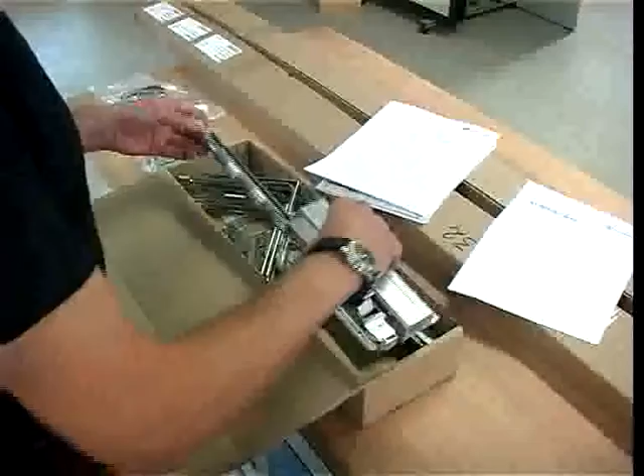You will need the following tools to install the fitting. Also required for fastening the fitting parts are a sufficient number of screws of different lengths and thicknesses.

Position the sash on the assembly table in such a way that you can easily access the handle side. Copy the necessary drilling and milling dimensions on the sash profile. These may vary depending on the type of gear that is used with the fitting. It is essential that the dimensions specified in the instructions be adhered to precisely.

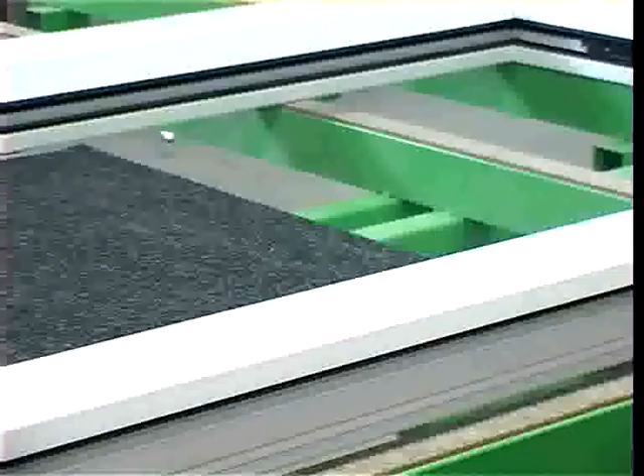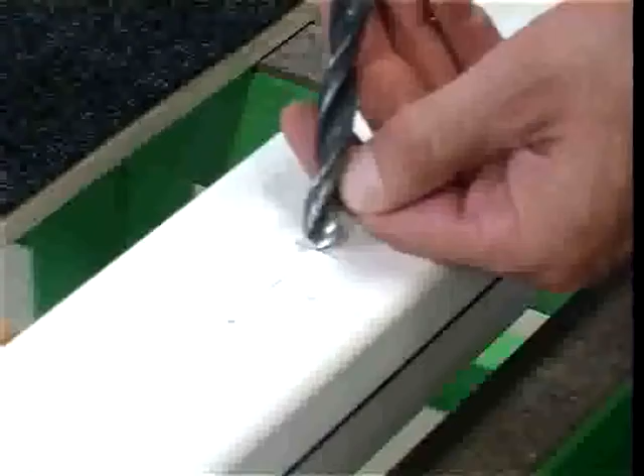After preparing the jig pattern in this way, drill a 12 mm hole that is approximately 40 to 50 mm deep. Next, mark the milled profile intended for your particular gear casing and machine it using a suitable milling tool.

The sash is now ready for the installation of the central locking gear. For this purpose, remove the four corners from the packing units and position them on the sash.

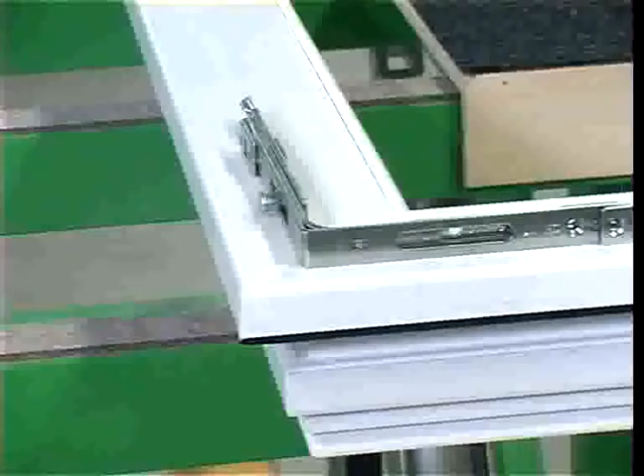It is important in this regard that you place the arms of the corners with the locking cams into the vertical sash profiles.

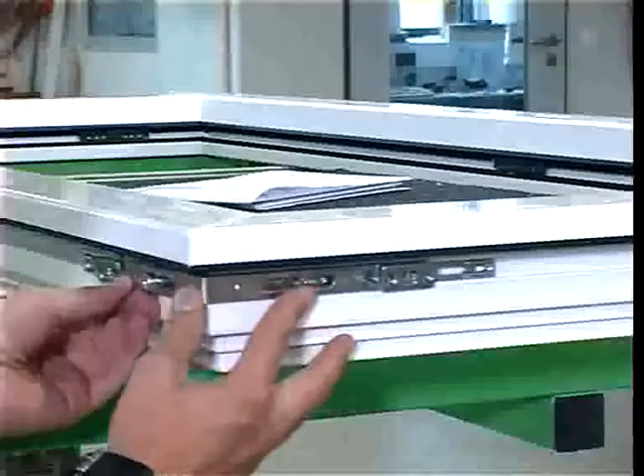Fasten the four corners using the included window construction screws. For this purpose, use the fixing holes found on the corner which are located closest to the sash corner.

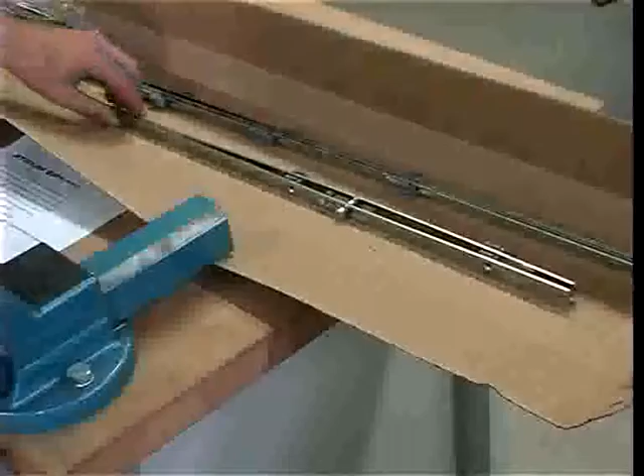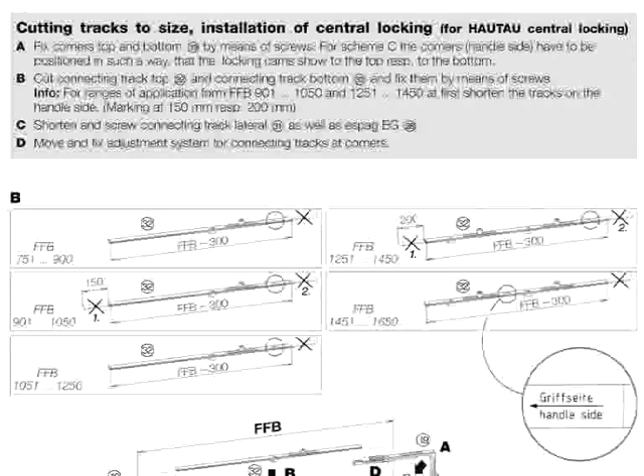The following is a demonstration of how to install the central locking gear. To make them easily detectable, the horizontal and the vertical locking have been bonded together to form small packs. Disconnect this bond and cut the individual locking parts to the correct length specified in the instructions.

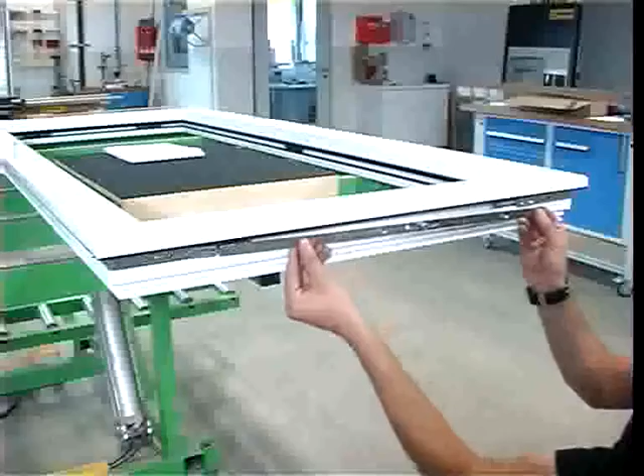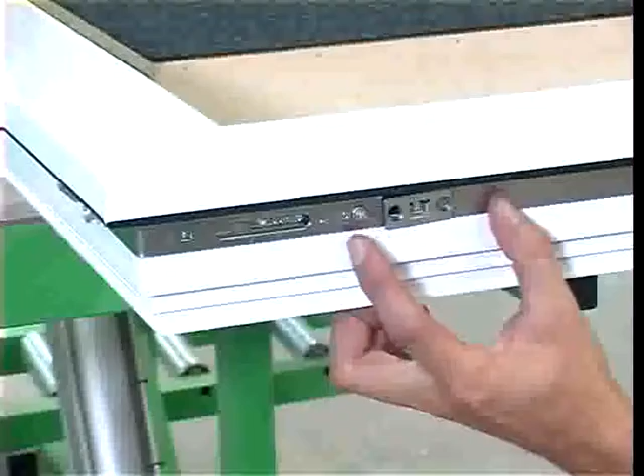To facilitate installation, information indicating the installation position has been punched into the horizontal locking. After cutting them to the right length, place the horizontal lockings into the corner and slide the clips on the corners to the left or right across the horizontal lockings before fixing the clips and the horizontal lockings in place using suitable window construction screws. Repeat this process on the opposite side of the sash.

The vertical lockings have been bonded together as well. When detaching this bond, you will find two different types of rods. One is the espag and the other is the locking rod for the non-gear side.

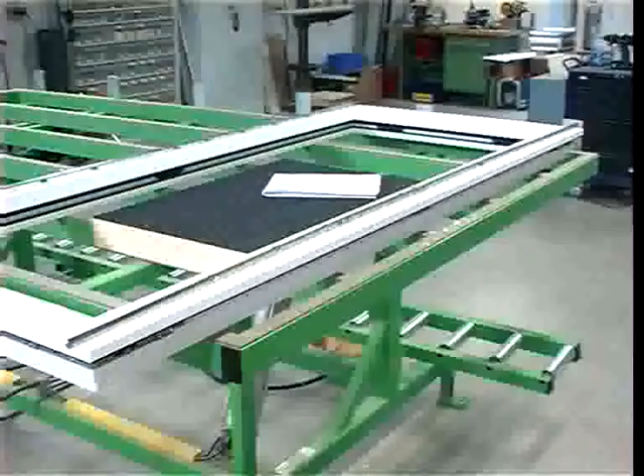Mark the cut to length positions on the locking rods before placing the rods into the corners and fixing them in place on the corners using the clips. Proceed by fastening the locking parts using window construction screws.

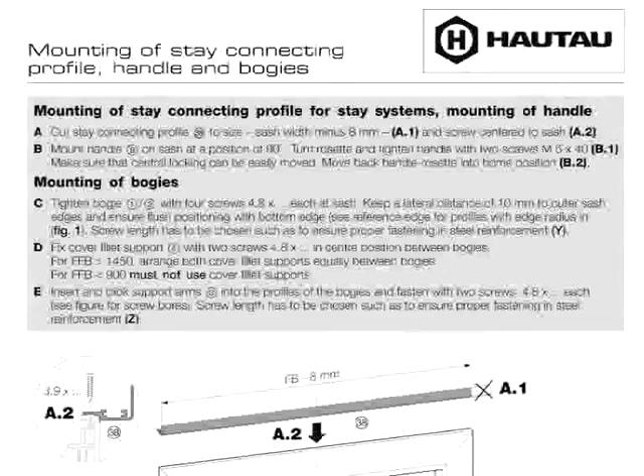Let us now move on to the installation of the holding rail on the upper sash. The stay system packing unit includes a varnished holding rail. Remove it from the packaging and cut it to the length as specified in the instructions.

The length of the holding rail equals the sash width minus 8 mm. Center the holding rail at the upper part of the sash and fix the holding rail in place using window construction screws.

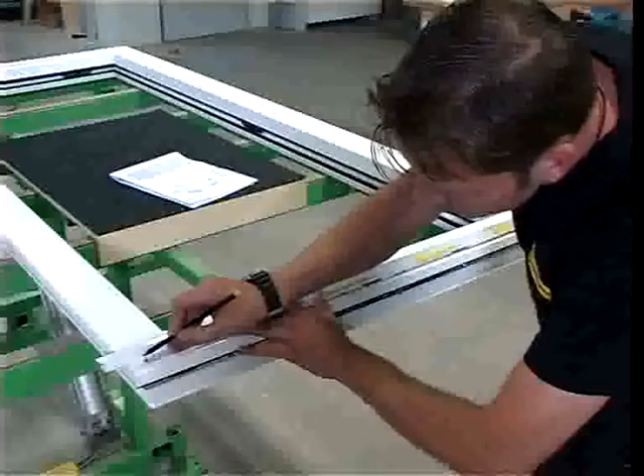The sash is now ready for the installation of the handle. Remove the handle from the included bag and place it onto the sash at the 90-degree position.

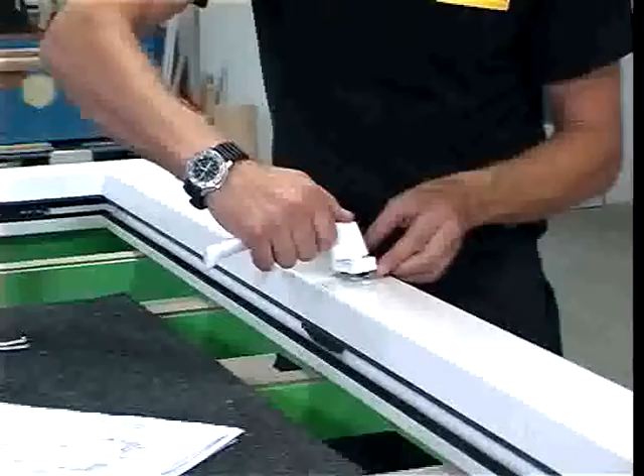Rotate the rosette to reveal the fixing holes and screw on the handle using included M5 x 40 mm screws.

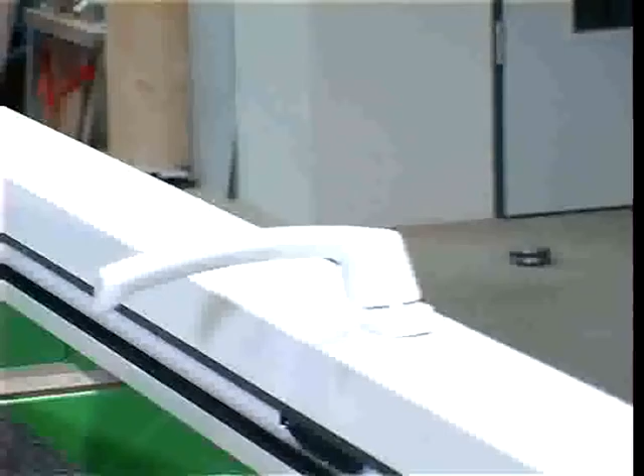Rotate the panel back to its original position and check the central locking gear for free movement. The first turn of the handle requires an increased amount of force in order to release the fixation of the central locking gear. Installation of the bogies.

Remove the bogie including the energy storage unit from the packing unit and check it for any possible damage.

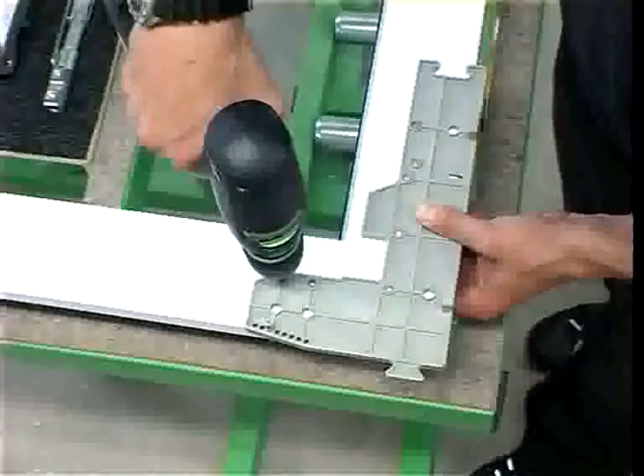Use the separately available jig and a drill bit with a diameter of 4.2 mm to ensure that the bogies will be seated correctly on the sash. Drill the necessary holes into the sash.

If the jigs are adjusted correctly, the bogies will be positioned 10 mm on the side next to the vertical sash.

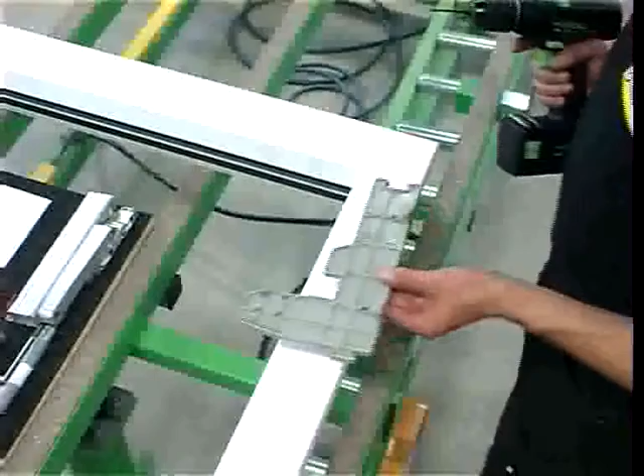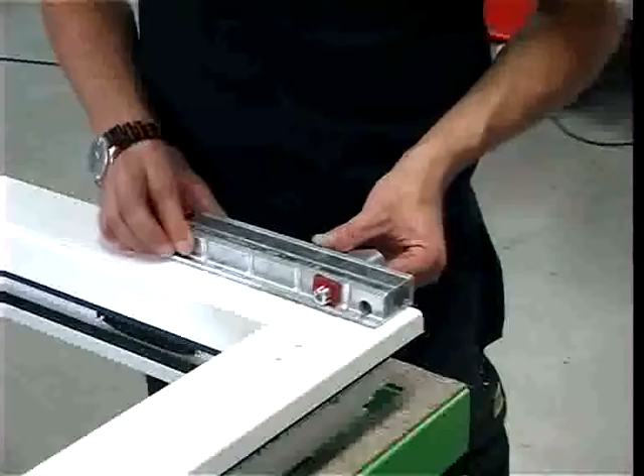Place the bogies over the prepared holes and fix them in place on the sash. Refer to the installation instructions for the size of the fixing screws.

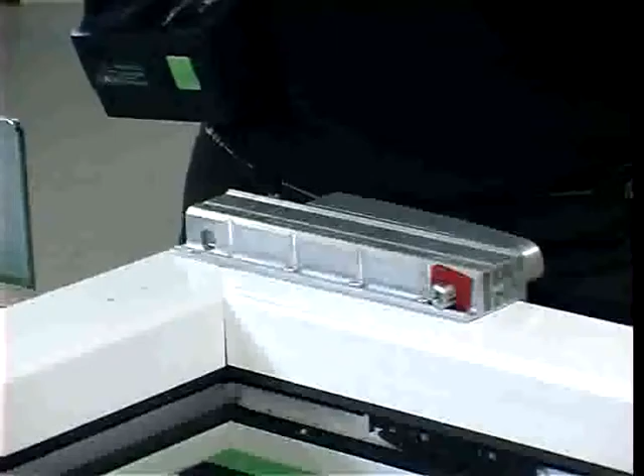The carton holding the bogies also contains two support arms that can be used on the right and left-hand side. Remove these components from the carton and slide them completely into the large holes before screwing them in place. The holes in the sash have already been drilled with the help of the jig.

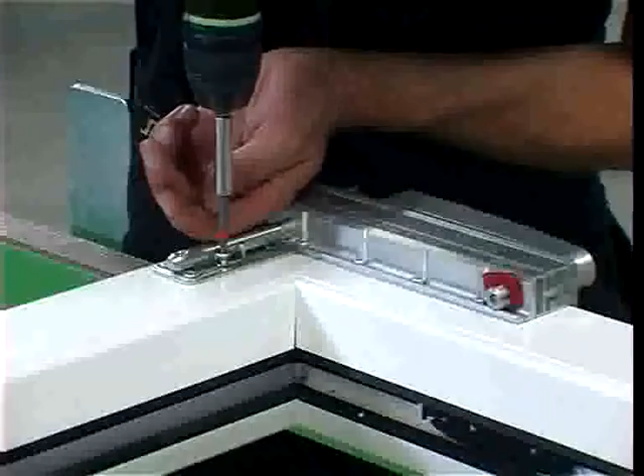Mount cover fillet supports if the sash width requires it. You will find them in the rail set. Prepare the installation of the cover fillet supports after consulting the installation instructions regarding the need to install them and the required quantity.

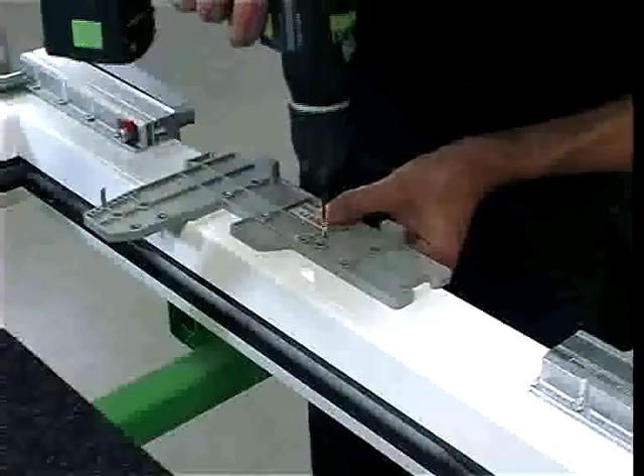Mark the position of the cover fillet supports and drill the fixing holes using, if possible, the jig and a drill bit with a diameter of 4.2 mm. Fasten the cover fillet support.

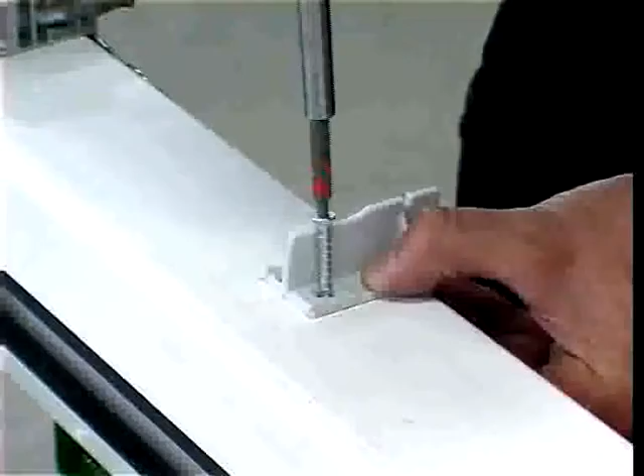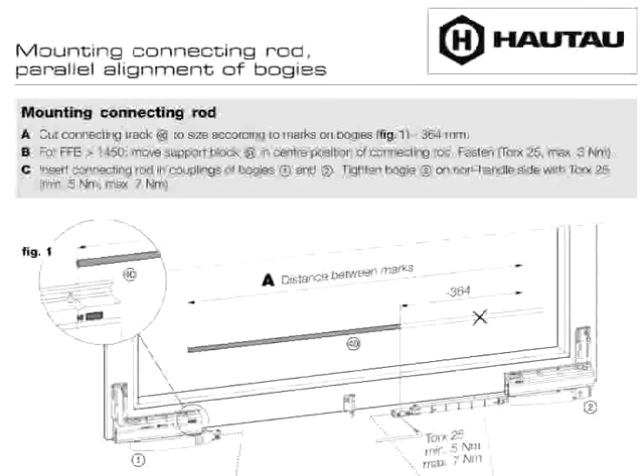Also included in the rail set is the connecting rod, which has a diameter of 8 mm. Specified in the installation instructions are the cut-to-length dimensions. Line up the connecting rod with the marking on the bogie without the energy storage unit.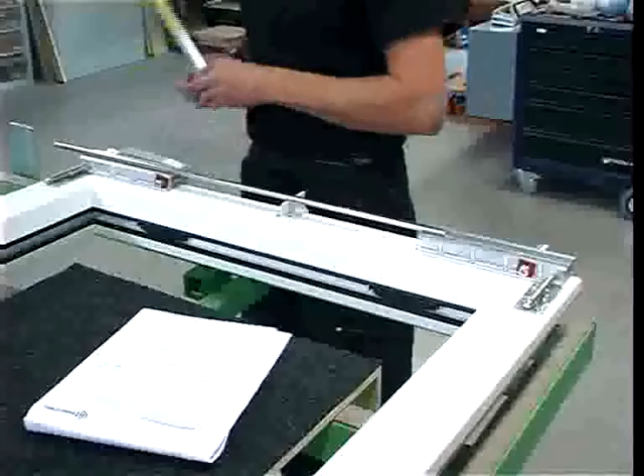Copy the marking on the bogie with the energy storing unit to the connecting rod and subtract 364 mm. This is the correct length of the connecting rod. Cut the connecting rod to the size that has been calculated and marked accordingly.

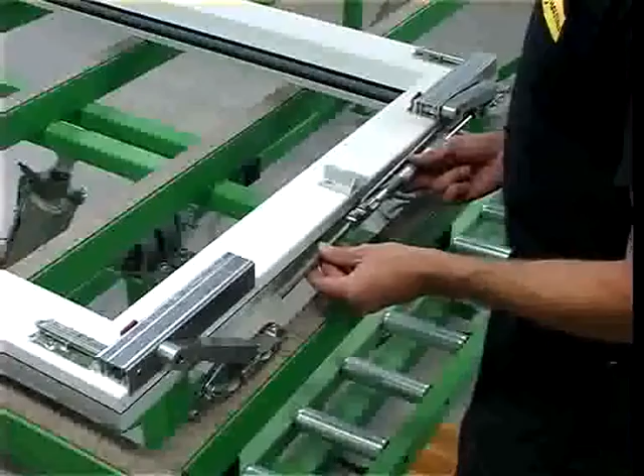Slide the rod into the sleeve of the bogie with the energy storage unit that is found on the non-gear side and tighten it to a maximum torque of 7 Nm. Use a conventional Torx 25 key for this purpose.

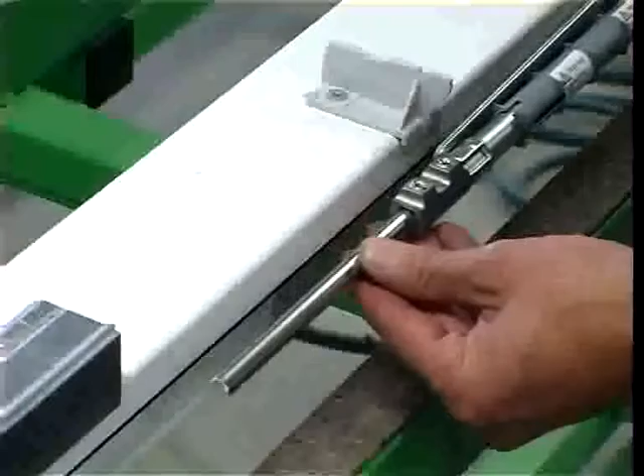Now slide the remaining end of the rod into the bogie on the handle side. Move the entire bogie assembly you created in this way to the top until it reaches the parallel end position. It is essential that the bogie assembly be parallel, as it may otherwise not function properly later on.

When its parallel position has been established, apply 7 Nm of torque to tighten the fixing screw on the bogie that is found on the handle side. Set the bogie assembly down.

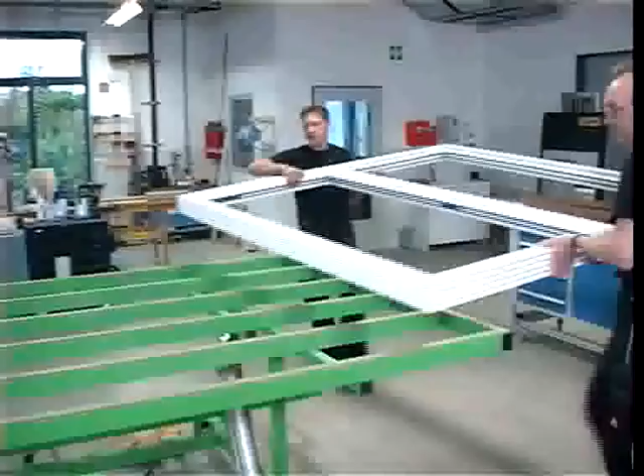The sash has now reached a preliminary stage of completion. The next step is the installation of the frame. Position the frame on the assembly table in such a way that you can mount the required fitting parts.

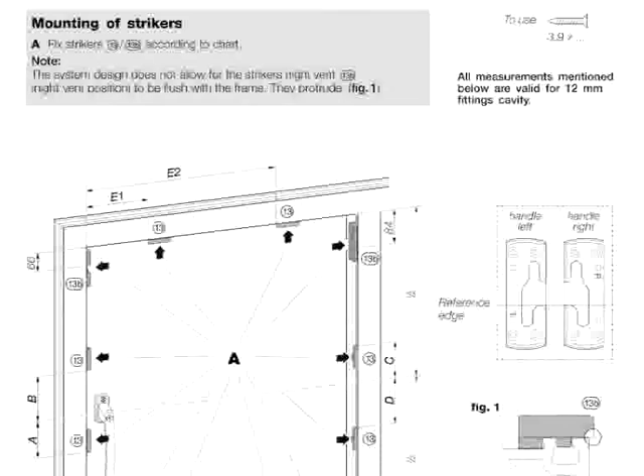With every shipment, you will receive 2 bags with strikers: 1 bag containing 4 pieces of night ventilation plates and 1 bag containing 6 pieces of strikers. For the exact positions of the corresponding plates, refer to the installation instructions.

Copy the dimensions specified in the instructions to the frame, paying particular attention to the position of each individual plate that results from the slide direction. The shape of the striker and the night ventilation plate defines the installation position on the frame. Fasten the strikers using window construction screws.

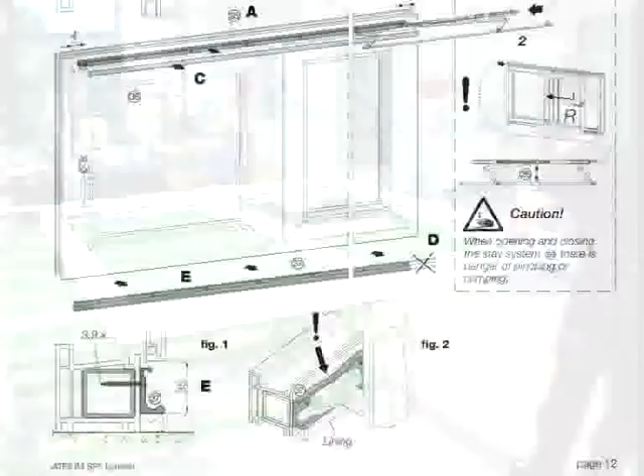Cut the guiding rail to the necessary size in accordance with the distance between the outer edges of the sliding sash and the fixed sash, minus 8 mm. The running rail is exactly as long as the distance between the outer edges of the sliding sash and the fixed sash.

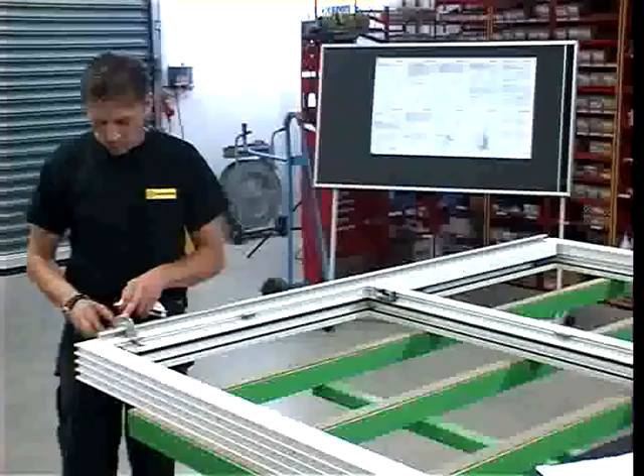The easiest way to determine the position of the guiding rail and the running rail is to use the optional jigs. Center the rails on the frame and place the jigs over the rails. Fix the jigs in place on the frame and drill the fixing holes.

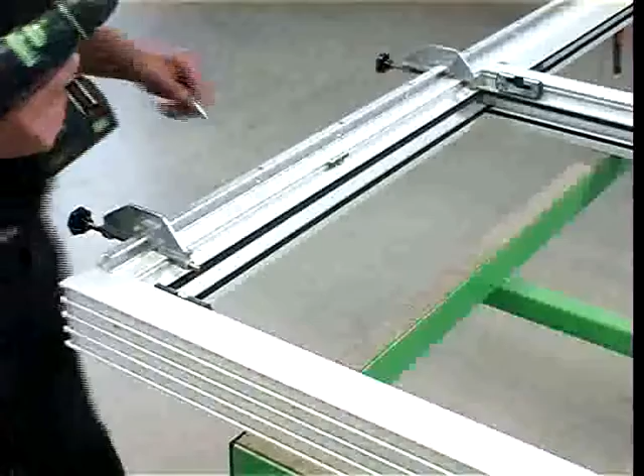To prevent damage to the rails and to place the holes in the central position, we recommend that you use the drill centering device. Fasten the rails using the designated screws.

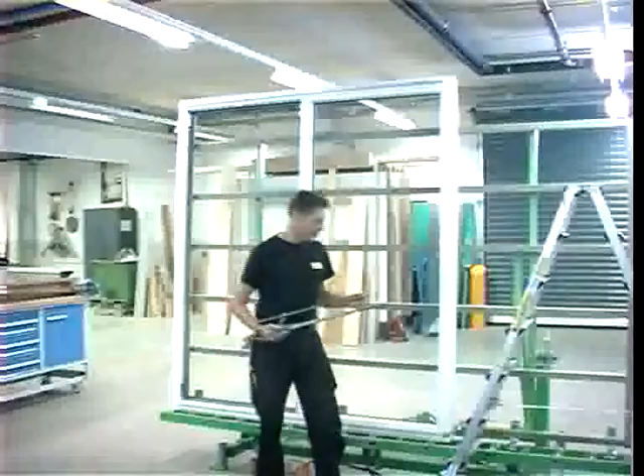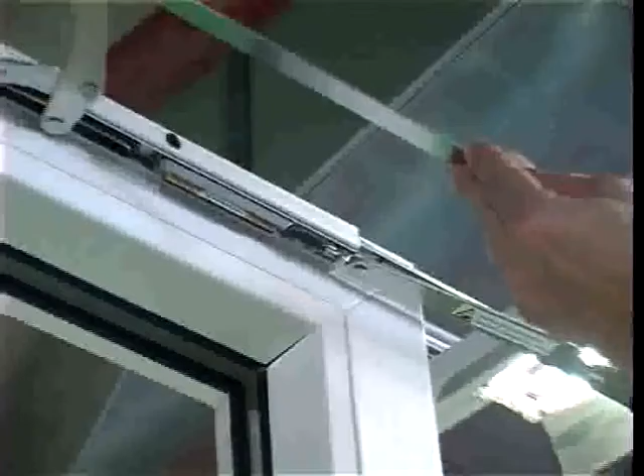Open the stay system. Be particularly aware of the existing crushing hazard. Approaching from the side of the fixed sash, slide the stay system into the guiding rail with the so-called control side first. While doing so, make sure the stay system slides in smoothly.

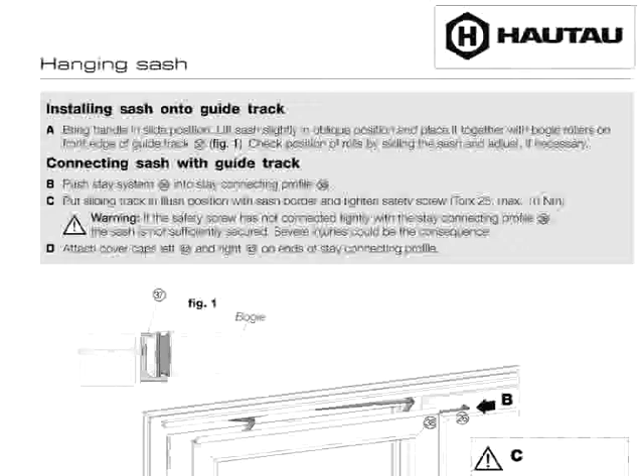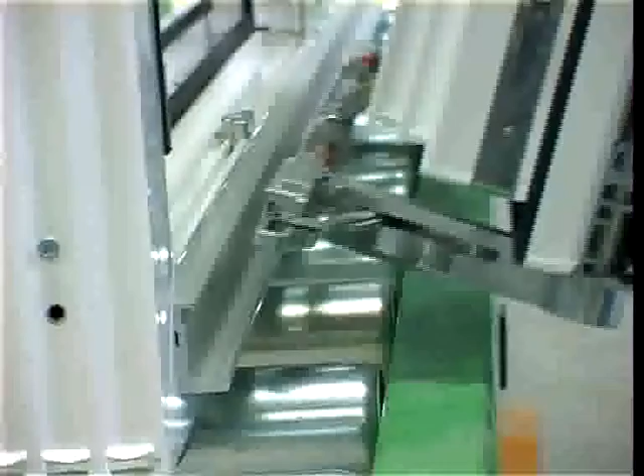Take the sliding sash and place it onto the running rail with the bogie assembly open. It is important that the rollers of the bogies come to a standstill directly on the running track of the running rail.

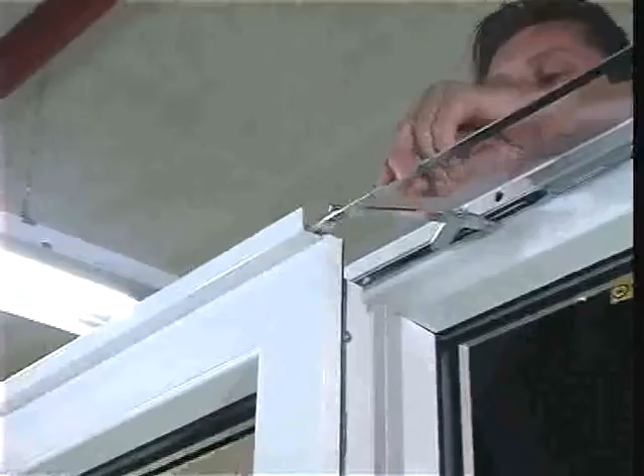Move the handle to the 90-degree position. Slide the stay system into the designated groove on the holding rail as far as it will go.

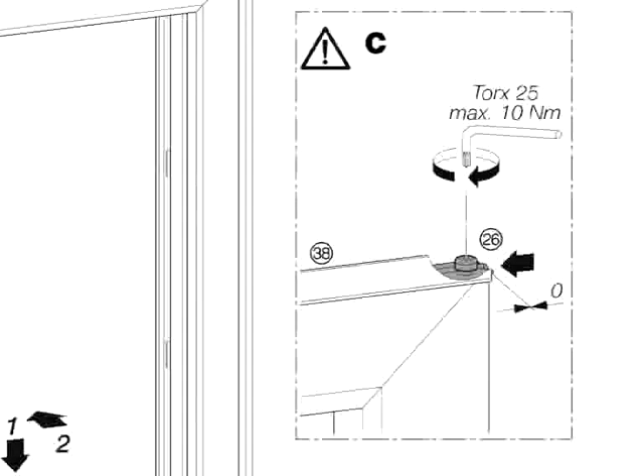Fix the stay system in place inside the holding rail using a Torx 25 key. The sash is now firmly connected to the frame.

The stay system set contains two smaller L-shaped collared caps. These form the end pieces of the holding rail. Slide the caps onto the front ends of the holding rail.

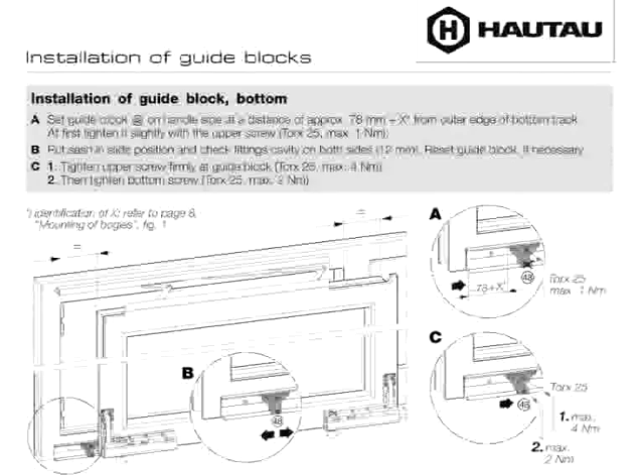The rail set contains a bag with several fitting parts. In the bag you will find, for instance, the guide block. The guide block is designed to guide the sliding sash correctly into the frame and must therefore be positioned accurately.

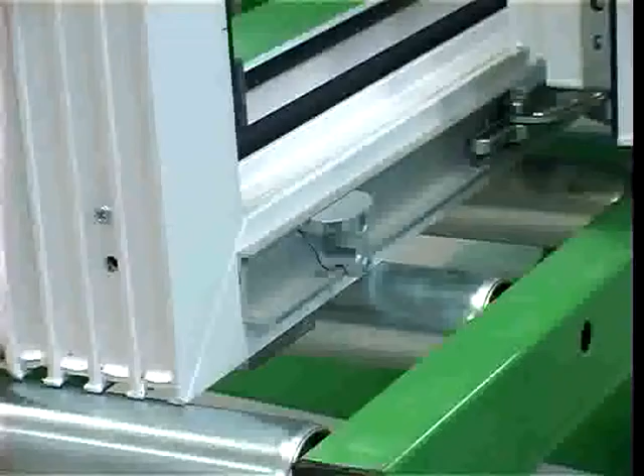For this purpose, slide it onto the running rail on the handle side, position it at approximately 78 mm as specified in the installation instructions, and fix it in place using the Torx 25 key. Make sure to only tighten the top screw at first.

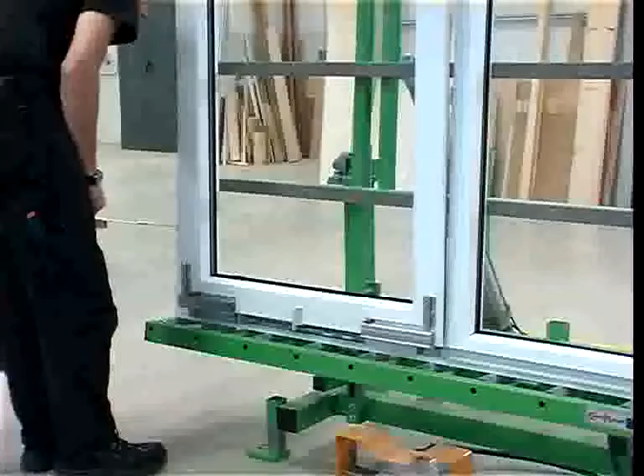Do not tighten the bottom screw until you have verified the final seat of the guide block.

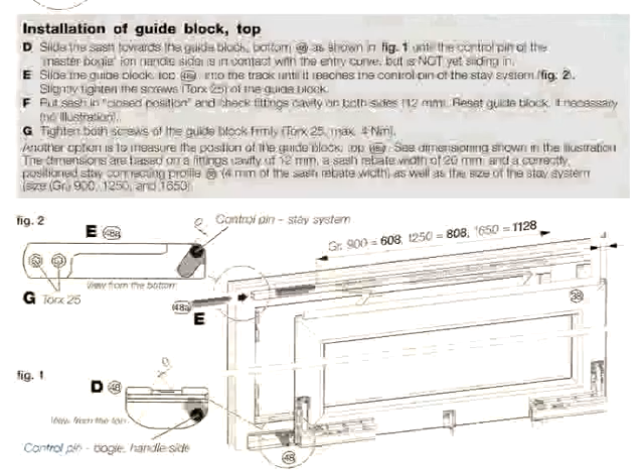The upper guide block is needed in order to ensure that the sash is guided evenly and correctly into the frame and that the stay system is released.

Move the sash up to the lower guide block before sliding the upper guide block into the guiding rail. Ensure that the fixing screws are located on the outside. Slide the guide block up to the stay system and fix it in place.

Perform a quick test to see if everything works and re-measure the position of the sash inside the frame.

If necessary, adjust the position of the guide blocks by the difference you may have measured.

Hautau GmbH includes a screw cover profile that is designed to conceal the screw holes on the guiding rail. It is part of the rail set and must be clipped onto the guiding rail after being shortened to the same length as the guiding rail.

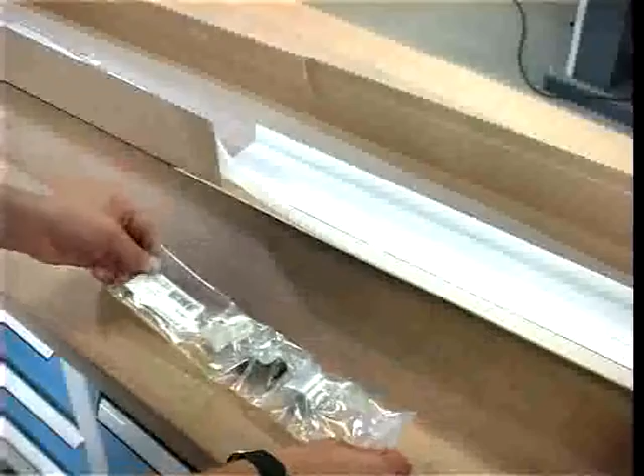The work on the guiding rail is completed by inserting the rear stopper and fastening the collared caps.

Slide the upper stopper into the guiding rail on the side of the fixed sash, with the threaded side facing down, before using the cap to seal the front end of the guiding rail.

Remove the lower stopper from the bag that is included in the rail set and connect the two individual parts in accordance with the slide direction.

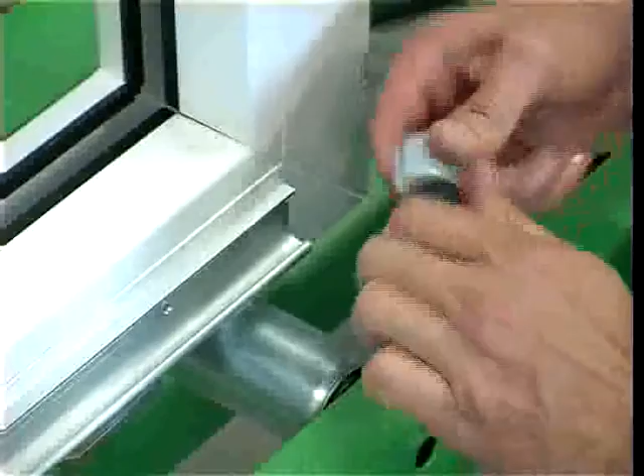Slide the stopper into the running rail on the side of the fixed sash until you reach approximately the center of the fixed sash section.

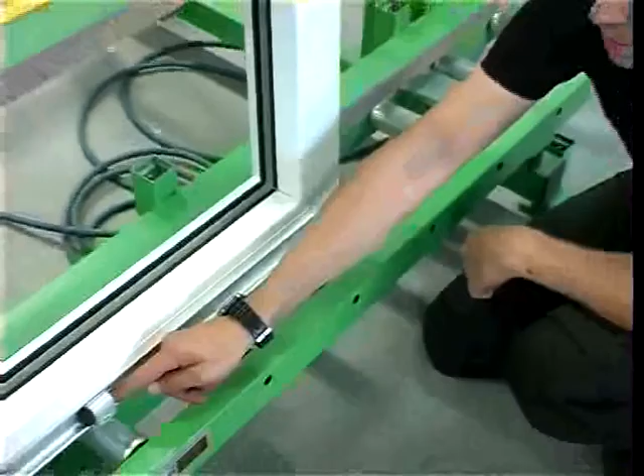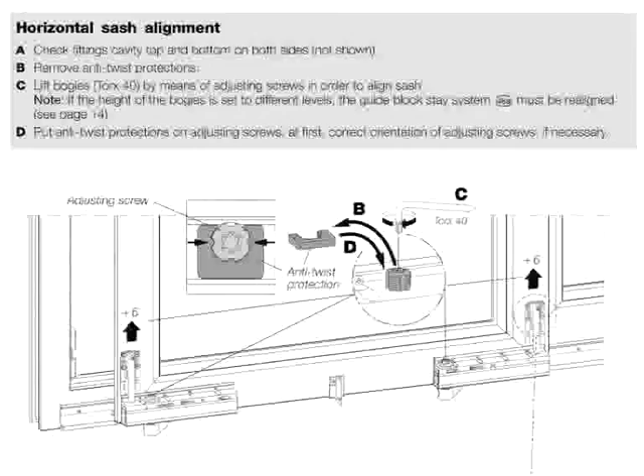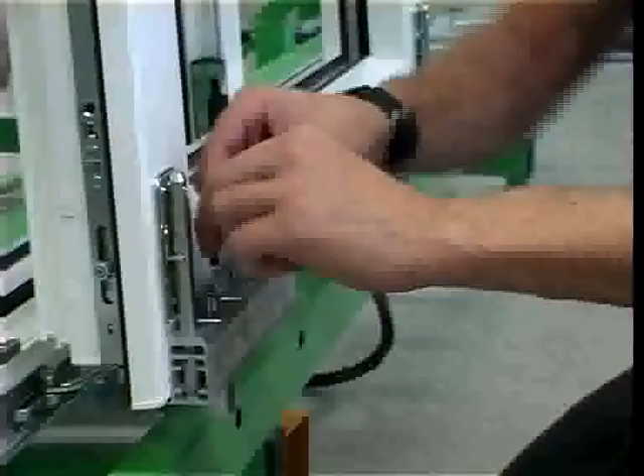It is possible to offset tolerances in height of the bogie. To do so, remove the anti-twist device on the affected bogie and correct the height setting using the adjusting screw. Make sure to reinsert the anti-twist device when you are finished.

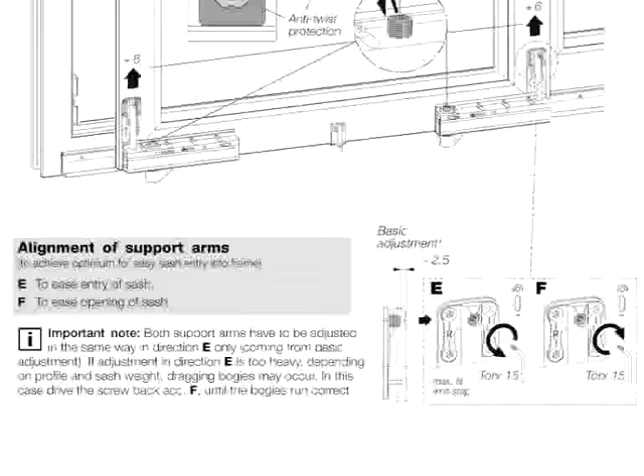You can also use the support arms on the bogies to influence the way the sash runs in and out of the frame. If these characteristics are in line with your expectations, you will, of course, not have to change anything.

To determine if the stopper is seated correctly, open the sliding sash and slide it towards the open position until the sliding sash completely reveals the passageway.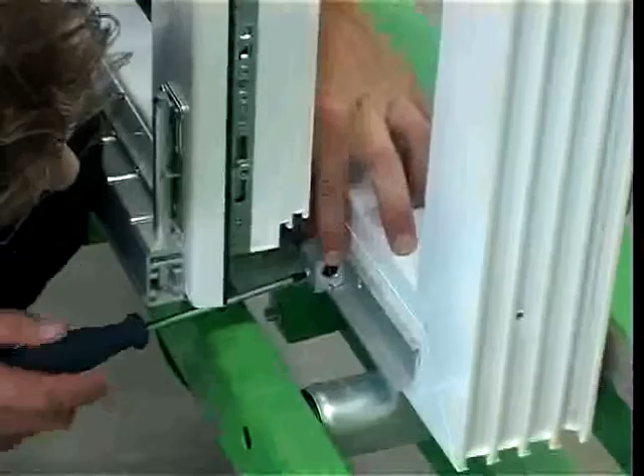Fix the lower stopper in place using the screw and repeat this process for the upper stopper.

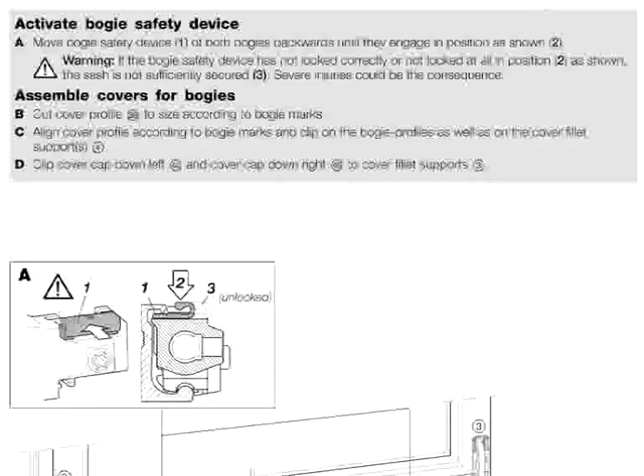Before you can finish your work, you must apply the bogie safety device. With the sash open, slide the red bogie safety device until you hear them engage.

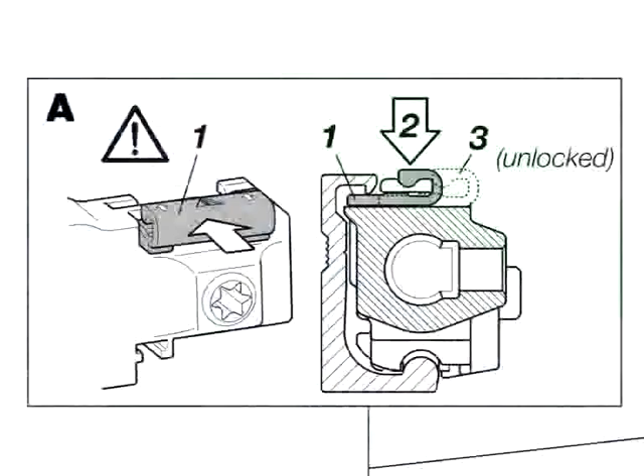Repeat this process for the second bogie as well. The sash is now secured against inadvertent derailing.

To conceal the bogies, the rail set contains the cover profile and the associated caps.

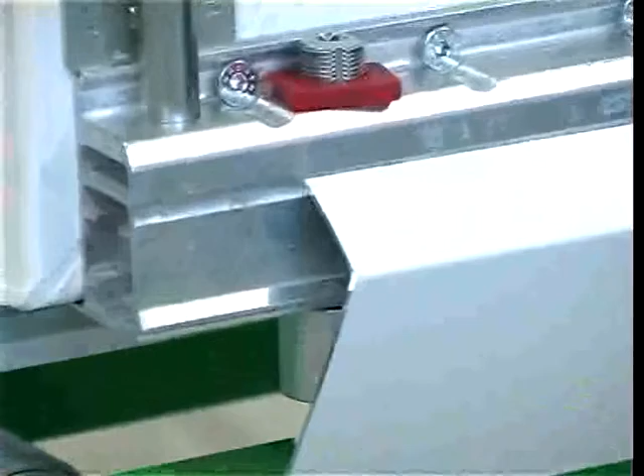The bogies include two markings which can be used to cut the bogie covers to the correct length. These markings are clearly identified in the installation instructions. Copy this marking to the cover and cut off the cover at this position.

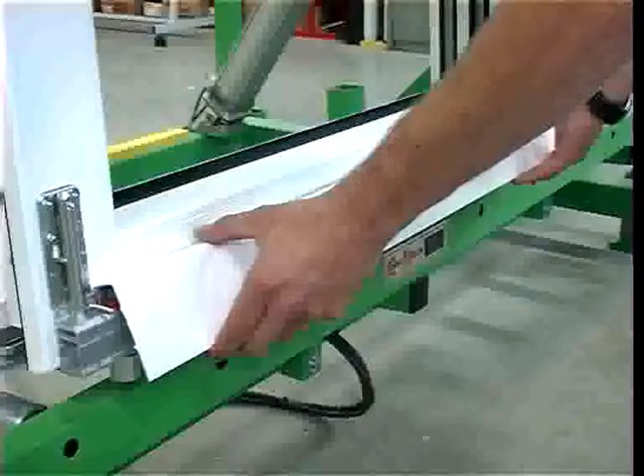The bogie cover must now be clipped on. Do not use a tool for this purpose, as this may damage the surface of the bogie cover.

Finally, remove the caps and clip them onto the corners of the bogies. This will cover the cutting edges of the cover profile by approximately 3 to 5 mm.

The operating label is included with every shipment of the Atrium SP Comfort. Attach it in a well-visible area above the handle on the sash.

Finish by verifying that the parallel slide element with soft close mechanism is fully operational.

Fantastic sliding technology. Hautau's innovative Atrium SP Comfort represents a revolution in the field of sliding windows, thanks to its unique soft close mechanism and a night ventilation feature.